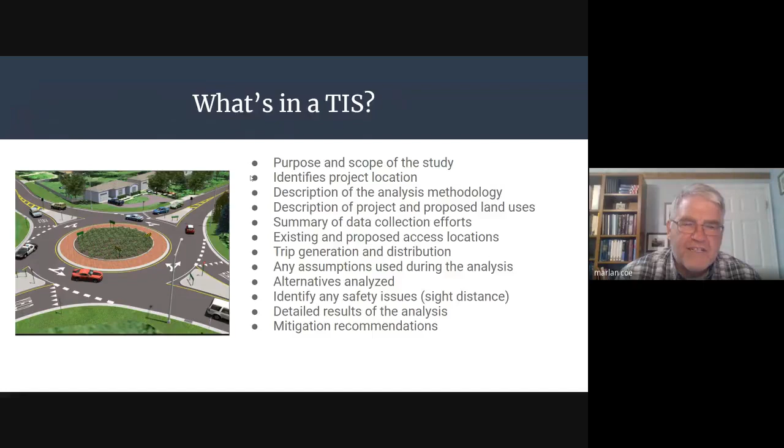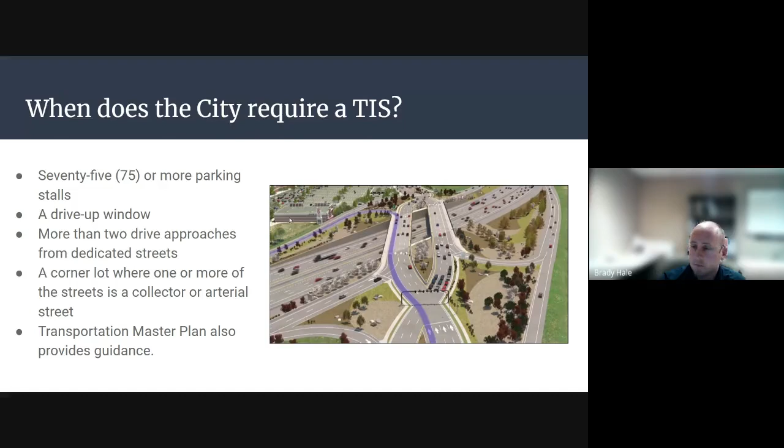Okay, so what's in a TIS? Here's some common things in a traffic impact study - it's not all inclusive, there could be some things missing, but we want them to have a purpose and the scope of the study, obviously identifying the project location, where it's at. We want them to describe the analysis methodology to make sure it's meeting standard practices - we'll go over that in a bit, what's utilized in terms of that methodology.

Obviously, description of the project, the data collection efforts. We want things like existing and proposed access locations, trip generation and distribution. This identifies the intensity of the project, how many trips it's going to generate on a daily basis, as well as during the peak periods, whatever that may be defined as.

Any assumptions used during the analysis, we want that included in the traffic impact study so we can make sure they're sound assumptions and that things are explained so we can understand how they came to conclusions or how the results came about.

Obviously, the alternatives that are analyzed - is it existing conditions plus project? Is there any future scenarios involved? Identifying any safety issues, things like sight distance issues and those type of things. And then we want detailed results of the analysis - actual output from the traffic simulation models used there, so we can verify and look at those. And then, obviously, the recommendations they make in terms of mitigating potential issues. Any questions on that?

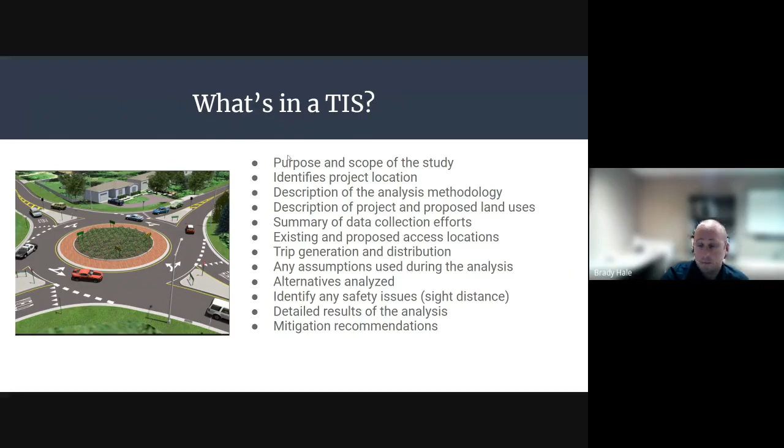Okay, so in terms of analysis methodology, the Highway Capacity Manual is the standard practice for that. The term level of service, LOS, is used - it's a scale from A to F, with A being the best and F being the worst, in terms of looking at delay per vehicle. So when intersections are being analyzed, this is the standard practice and methodology used. We want to make sure that when they come through, they are meeting these requirements and including this methodology.

There are different thresholds in terms of signalized versus unsignalized intersections. So here we have a table with the level of service A through F for signalized and unsignalized intersections. One thing to note - if we look at level of service D, for example, you'll notice the delay for a signalized intersection is higher than the delay for an unsignalized intersection. The expectation is that people are more willing to wait longer at a signalized intersection, for a couple reasons.

They understand that it's usually more congested there, and they know that eventually they're going to get a green arrow or green signal to let them move through. So it's really an expectation and perception thing, where at unsignalized intersections, the delay and willingness to wait isn't as high as it would be at a signal.

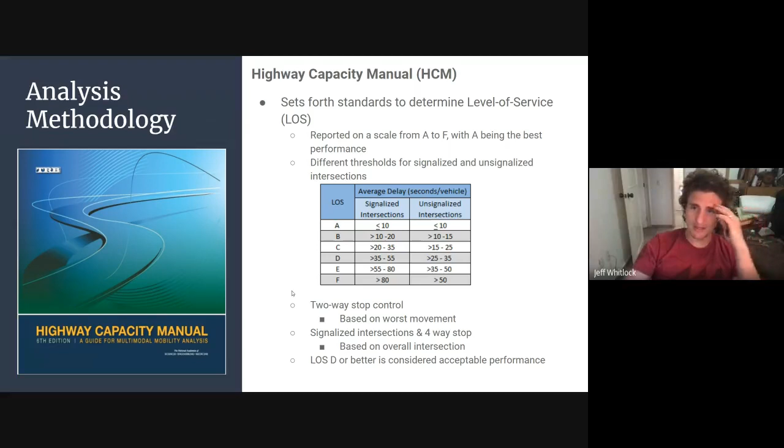With these traffic impact studies, we have analysis tools - it's really micro simulation software that is utilized. We'll go over data collection, what that is, and that gets put into these simulation models, and that's where they calculate it. They have the methodology of the HCM based in there, and that's how it spits out the results.

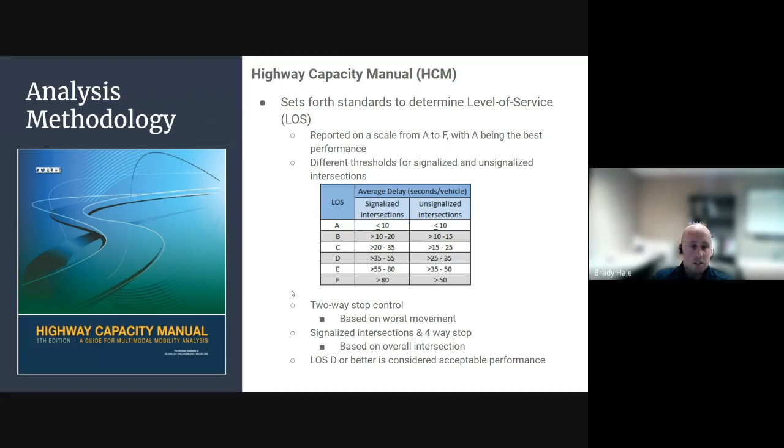I think you're more referring to the detection and that kind of stuff at intersections initially, in terms of determining the number of vehicles. So it's not that, it's actually that they do data collection, put that information into these simulation models, and then they spit out the results with that.

Did you say you're going to cover the data collection further in your presentation here? Yeah, I think here in a few slides.

So kind of a TIS process - this is typical of what you could see with this, where we want the existing conditions documented. And so that is the data collection, that's where we're going out getting the traffic counts and those types of things. And then an important thing is to estimate the new trips of the proposed development. This is based off ITE, the Institute of Transportation Engineers - they have a trip generation manual, and that's the standard practice to utilize to estimate trip generation.

We'll go over that here in a little bit as well, and look at some charts and that kind of stuff on a specific land use, and look at what that looks like.

Once those trips are calculated, those are assigned to the network. You look at distribution and all that kind of stuff, where potentially people could be coming from, going to, existing land uses that are generators, freeway locations, and all that kind of stuff, to help get that distribution, as well as the existing traffic patterns. Once those are done, the TIS will assess the impact, using the highway capacity manual thresholds, looking at existing conditions versus plus-project conditions, and what impacts we're seeing, if any.

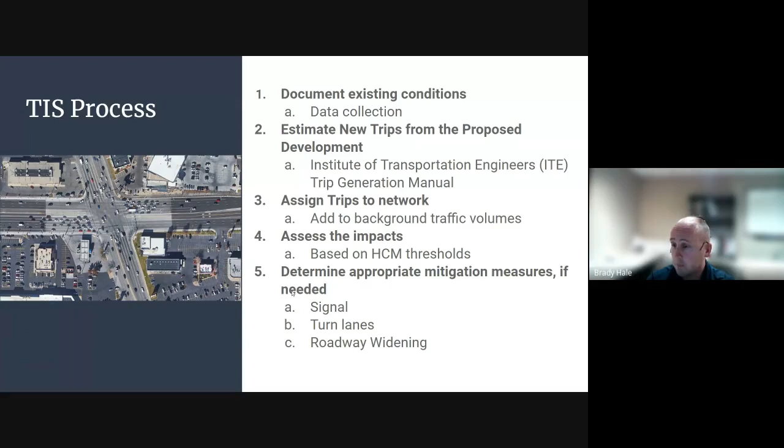Then we determine the appropriate mitigations. I put on here like a signal, right? There could be some intersection that's failing, and before the project comes in, it's operating acceptably. It could come with a project and it's failing. We do signal warrants. If those signal warrants are met, we look at potentially putting in a signal because of the project. Turn lanes as well, could be a left turn lane, right turn lane, deceleration lanes, those type of things, as well as potentially roadway widening.

So, a little bit on data collection. Typically it's also dependent on the land use as to when it's considered the peak trip generation time. But typically traffic volumes are counted on a Tuesday, Wednesday, or Thursday. We consider those typical, since on Mondays and Fridays people are leaving early, or gone in general, or coming back from a vacation.

Counts are typically done during the AM and PM peak periods, so that's typically 7 to 9 in the morning and 4 to 6 in the afternoon. They'll go out there and count for those two hours, analyze that, and determine when the actual peak hour was, using consecutive 15-minute periods to define the peak hour.

What if there's an in-and-out going in on University Parkway? Would they maybe change that to catch the lunch hour?

Sure, yep, absolutely. It is dependent on the land use. On a Saturday, if a big department store or something like that was coming in, you'd maybe want to look at a Saturday and see what that looks like, because that could be the peak generator and could actually result in the busiest time, showing the greatest impacts to the roadway network. So it's dependent on the land use and when you expect people to come and go. The project can still generate a lot of trips, but maybe Saturday volumes are really low, so you wouldn't need it. But it would be one you'd likely want to require Saturday counts for as well, in terms of including your typical AM and PM peak, just to make sure you're capturing everything.

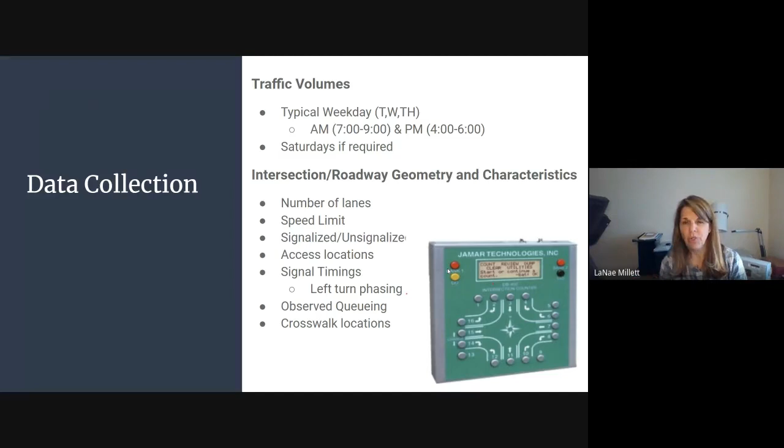But other times, some are using cameras, and they'll go out there and set up a camera on the signal pole so that you can see all the intersection locations. Then they could go back and review that and count that way to determine the traffic volumes. And does it say in their report how they collected the data? Oftentimes, no, it doesn't. It doesn't specify how that was collected. Yep.

Okay, any other questions on data collection?

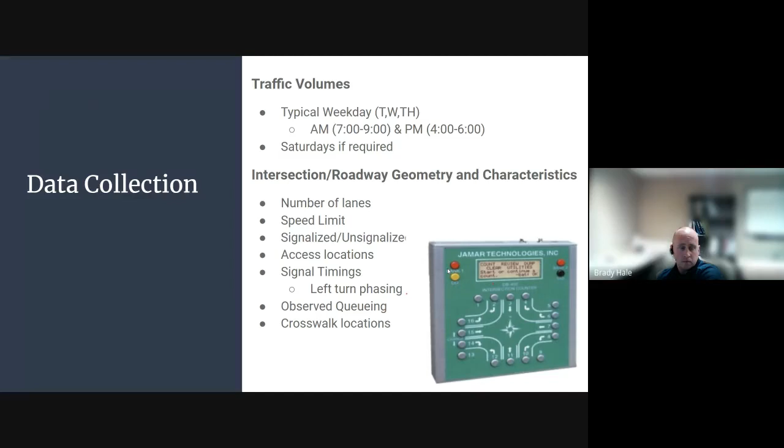Okay, so this is just a little bit of the intersection analysis tools here. There are multiple traffic simulation softwares out there that you can use. There's a handful of them really. The one that we obviously see a lot is called Synchro or SimTraffic. Those are used for traditional 4-leg intersections, your simple intersections, traditional intersections. 4-leg, they can be T intersections and that kind of stuff.

But when we start getting anything complex, back to like our diverging diamond interchange, continuous flow intersections, through turns and all that kind of stuff, this VISSIM here is used for that. Synchro and SimTraffic are actually from the same firm, but the analysis is a little bit different. Synchro is what's called deterministic. So you're basically putting information in, and it's going through equations from the Highway Capacity Manual, and those are just being outputted to you.

SimTraffic is stochastic, so it's variable. The majority of the time people will do a minimum of 10 simulation runs, so you get the variability, the randomness of typical traffic out there, and then those results are averaged together to get your output.

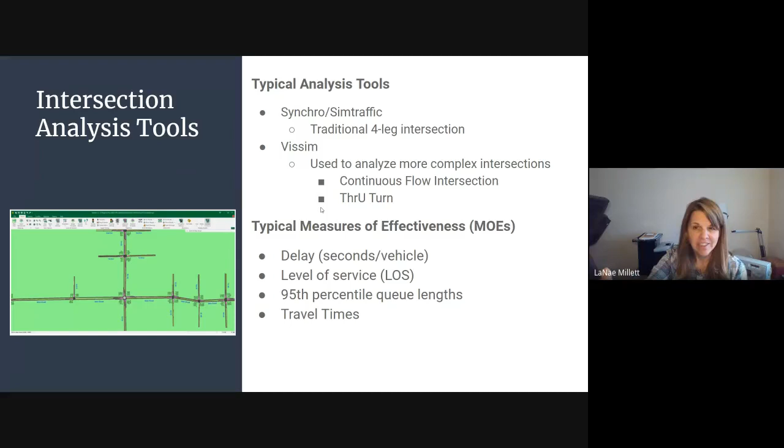Okay, so stupid question. Does that mean that 95% of the people get through the light? They're sitting in the queue? No, it does not. It's just a length, and 95% of the time people can fit within that storage length. That's all it is. Any questions there?

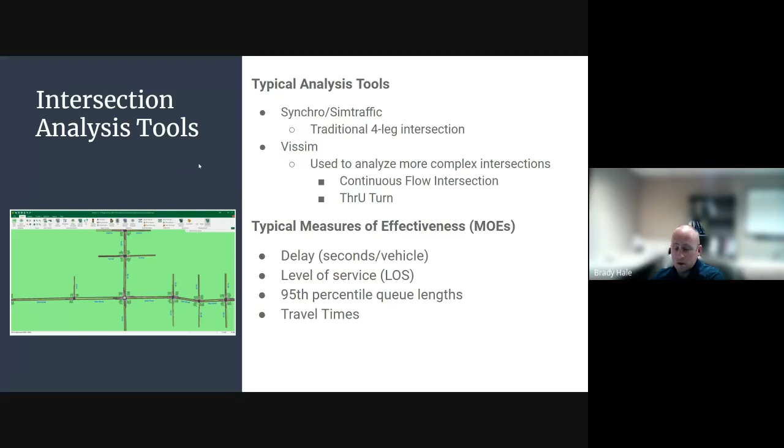Okay, so a very important part of traffic impact studies is obviously the trip generation. As I mentioned before, ITE, the Institute of Transportation Engineers, is the standard practice in terms of determining trip generation. They've got 9 land use groups, listed here, totaling 170 different land use types. So doing your trip generation, you want to make sure that whatever use is going in is accurately represented in the ITE, in terms of what's most similar to the development.

So this is just an image from ITE. So this is the services land use group right up here. And so what it has is a list of land uses under this land use group. Banks: if the project was going to have a bank and it was going to be a walk-in bank, you'd use land use code 911.

If you're doing a fast food restaurant with a drive-through window, you want to use 934. So they have these, and you want to obviously just pick the one that best represents that project there. Do those correlate to trips at all, those numbers, or is that just a number given? No, that's just the number given that kind of reflects that land use. We'll go over that a little bit here, LaNae.

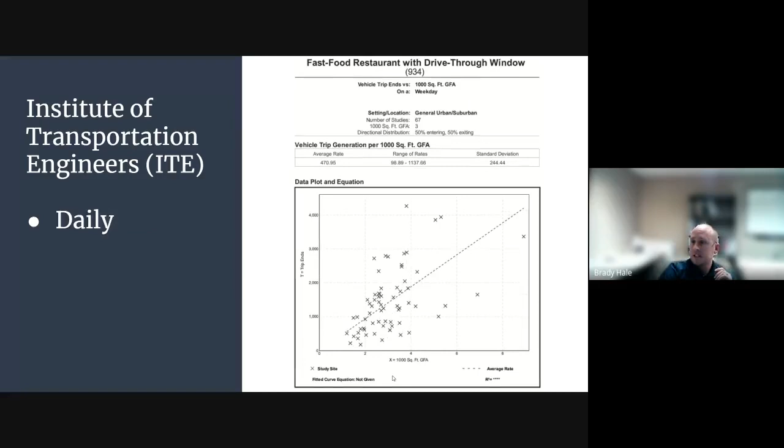So that's standard practice, but it is an important part of the traffic impact study. It's important to make sure whether they're using the average rate or the fitted curve appropriately based on ITE recommendations. So any questions with trip generation?

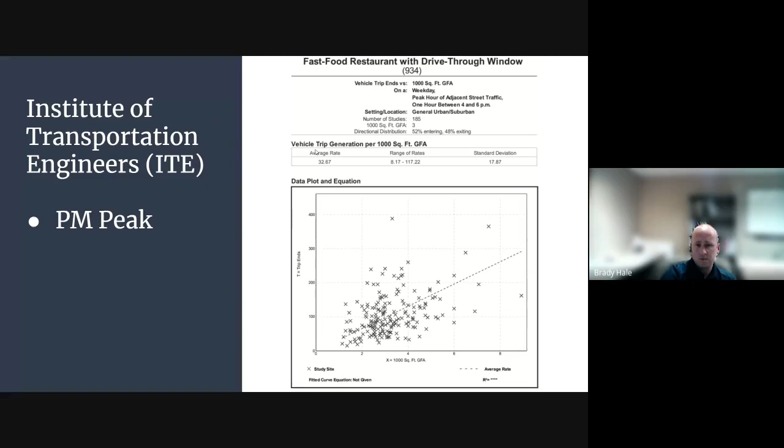Okay. So I think this is really the last slide that we have. So when this comes through to us, we're really looking at, simply, with some of the analysis results and even the approach taken in the study, does it make sense, right? And that's looking at the results.

For example, you might look at an intersection in existing conditions, and let's say that it has 30 seconds of delay, and that's existing conditions. And then let's say you've got the project, which is adding trips to it, but for the same intersection and location, the report's showing maybe 25 seconds of delay, and you'd ask yourself, okay, so trips have increased, but my delay decreased. Why is that, right? So those are some of the things that you do want to look for and look at, and there are some instances that can be the case.

For example, a project that adds a lot of right turns could actually reduce delay at an intersection, because they're shown as cars still going through, but they're not having a lot of delay because they don't have to wait there, as a left turn would need to, in terms of associated delay. So there are those instances, but they are more rare. But those are some of the things that we want to look out for and be aware of, just to make sure that it makes sense. I mean, that's the big part of it.